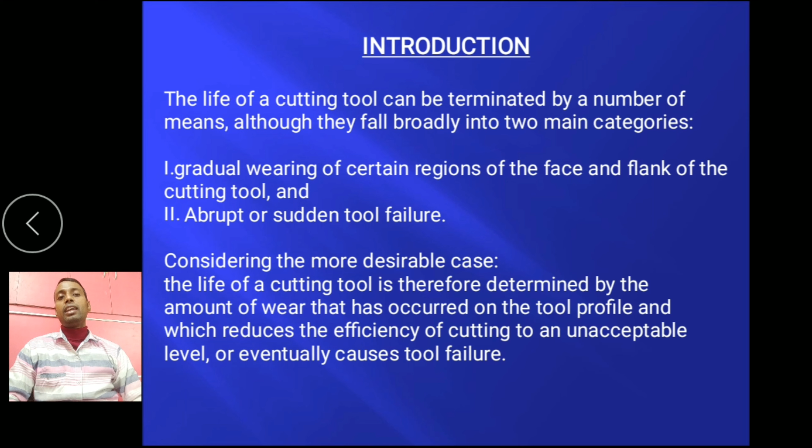Considering the more desirable case, the life of a cutting tool is determined by the amount of wear that has occurred on the tool profile, which reduces the efficiency of cutting to an unacceptable level and eventually causes tool failure. When the tool wear reaches an initially accepted amount, there are two options: to resharpen the tool on a tool grinder, or number two, to replace the tool with a new one.

This second possibility applies in two cases: when the resource for tool resharpening is exhausted, and number two, the tool does not allow for resharpening, as in the case of the indexable carbide insert.

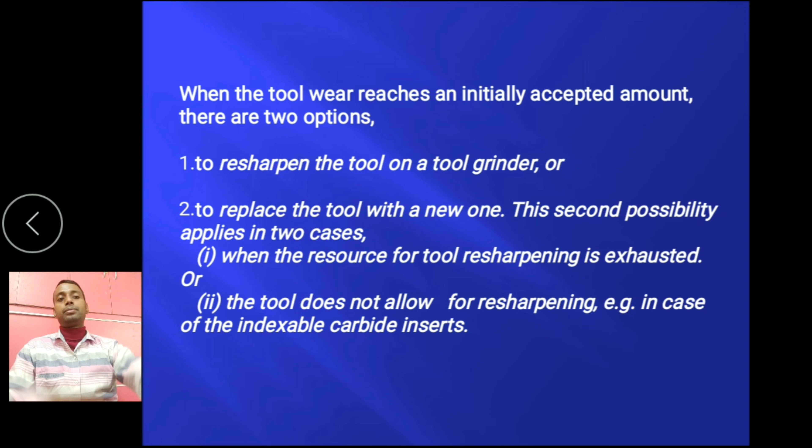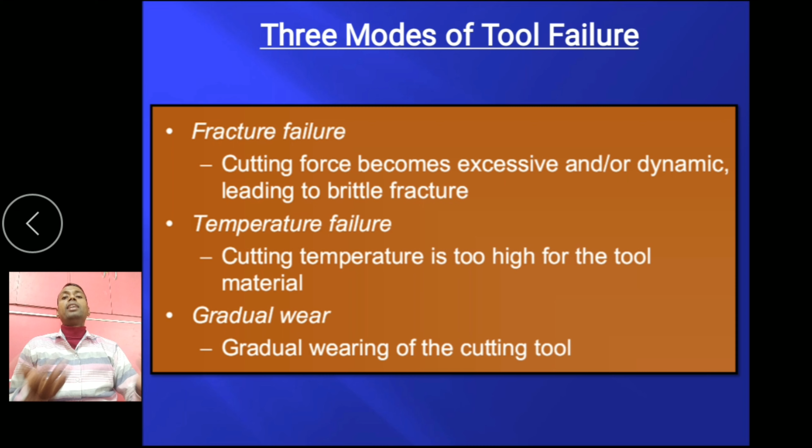There are three modes of tool failure: fracture failure, temperature failure, and gradual wear. Fracture failure means cutting force becomes excessive and dynamic loading leads to brittle fractures. Temperature failure means the cutting temperature is too high for the tool material. Gradual wear means the cutting tool wears gradually as so many machining operations take place, and the tool fails after a certain time.

The preferred mode of tool failure is gradual wear. Fracture and temperature failure are premature failures. Gradual wear is preferred because it leads to the longest possible use of the tool.

Gradual wear occurs at two locations on the tool: one is crater wear and another is flank wear. Crater wear is generally found on the rake surface, at the top of the rake surface, and flank wear is generally found on the clearance surface. This is the diagram.

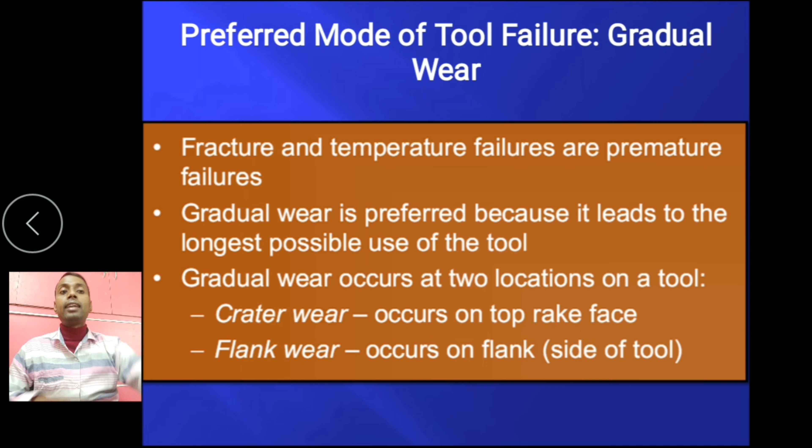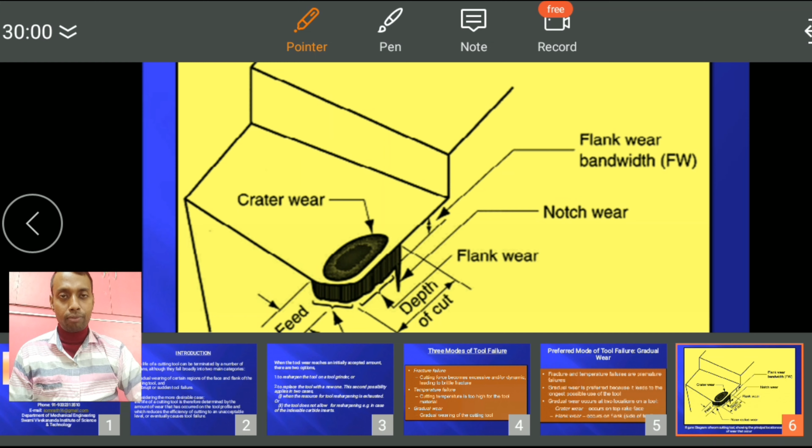Crater wear is found here, basically on the rake surface. Let's see the proper diagram. Crater wear is found here, and flank wear is found in the clearance. This is the original view of crater wear and flank wear.

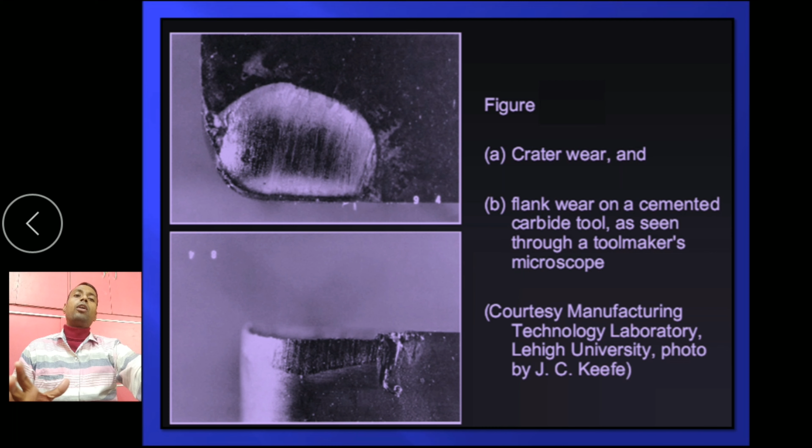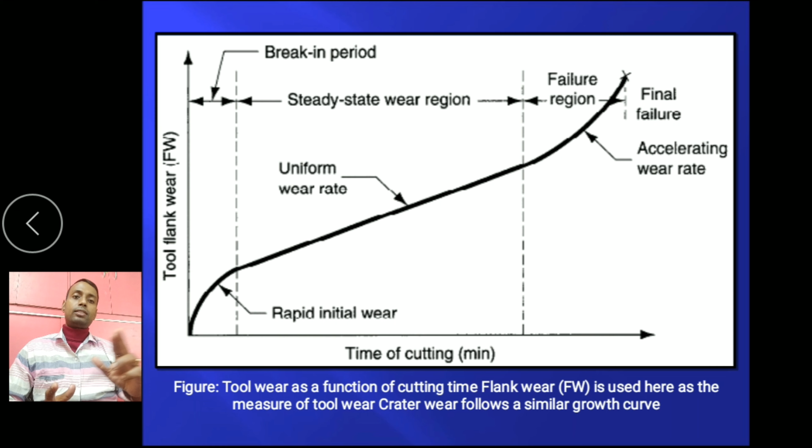Tool wear as a function of cutting time, flank wear: this is the rapid initial wearing. After that, for a certain time, this continues going on. This is the uniform wear rate region. After that, failure occurs. This is the failure region.

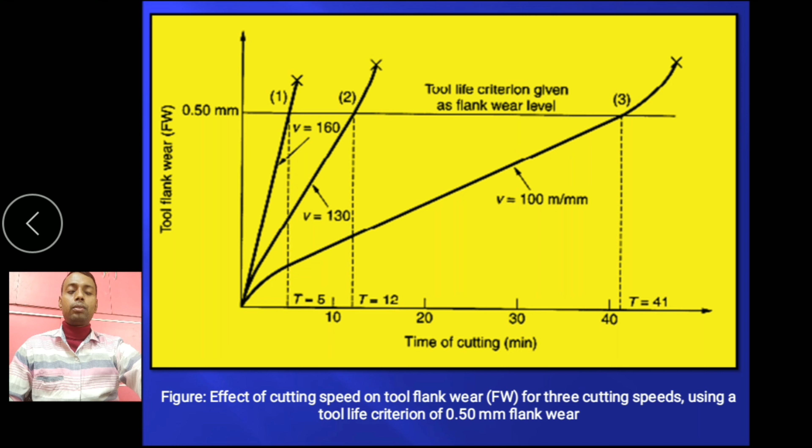Now, scientist Taylor expressed some equation for tool life: V times t to the power n equals constant. A very simple equation: cutting velocity and tool life give a constant. If V is increasing, T will go down. If T is increased, that means V is obviously low.

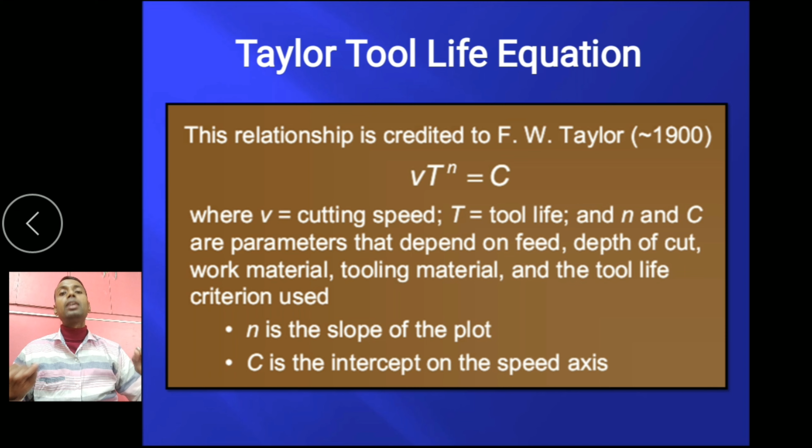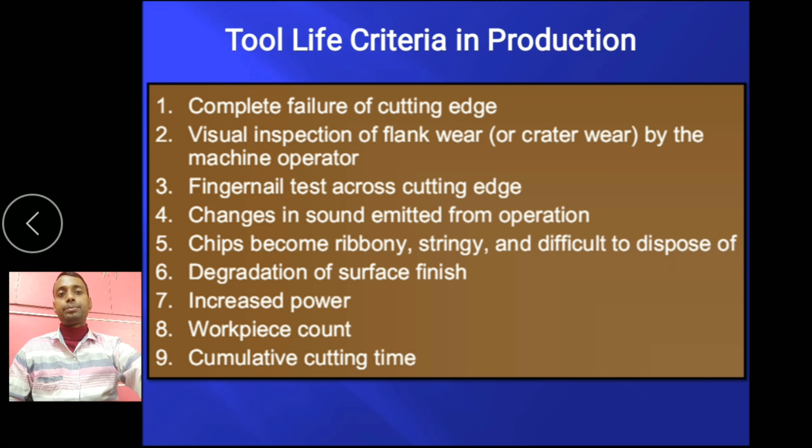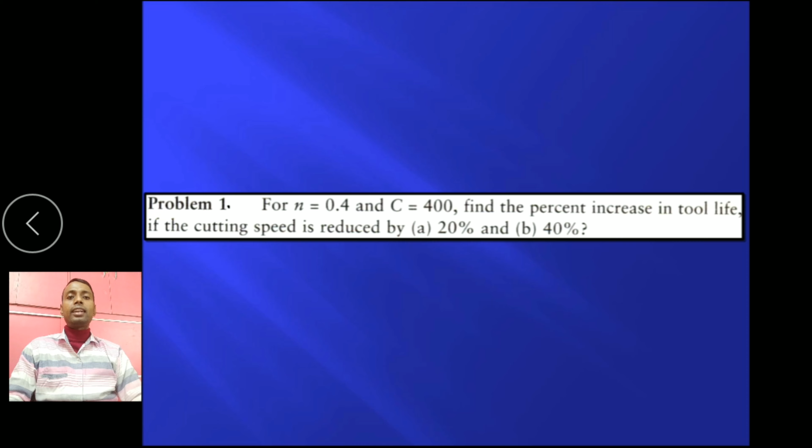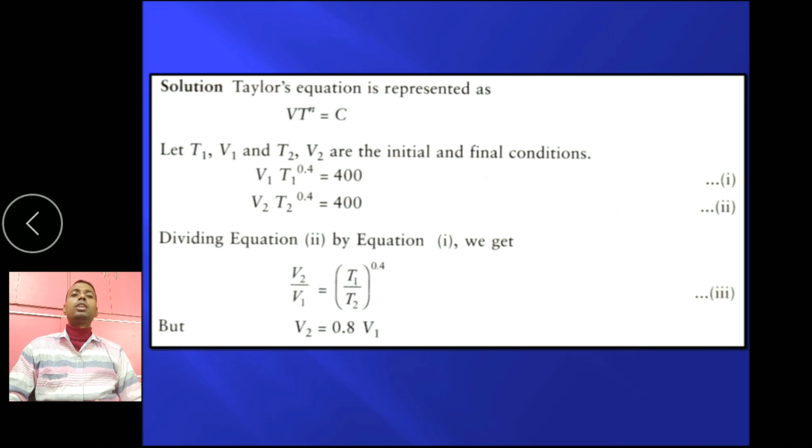Now, if I solve one problem, it will be better understood with this equation V t to the power n equals constant. For n equal to 0.4 and c equal to 400, find the percent increase in tool life if the cutting speed is reduced by 20% and 40%. So the formula is V t^n equal to constant: V1 T1^0.4 equal to 400, V2 T2^0.4 equal to 400. Dividing this, V2 equals 0.8 V1.

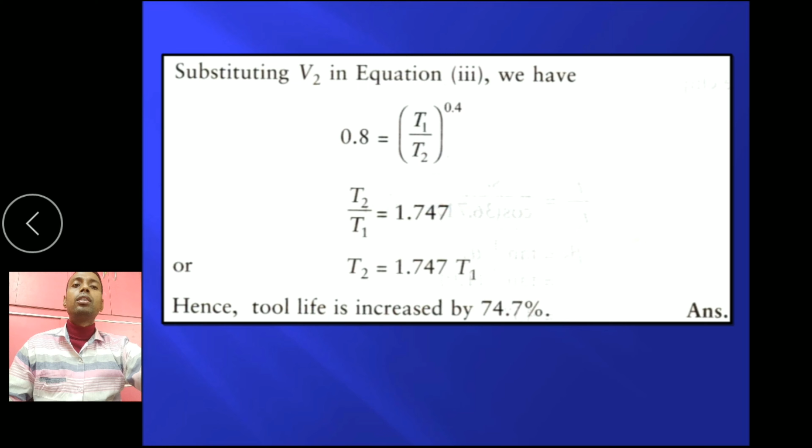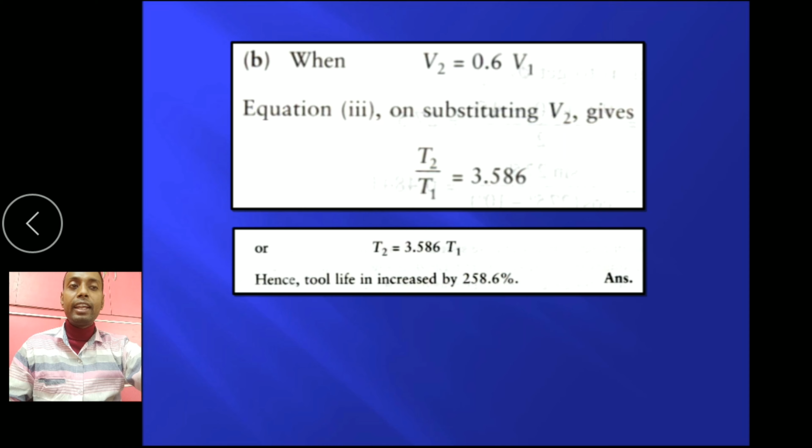So replacing this, what is T2? Hence tool life is increased by 74.7%. And for part B, when V2 equal to 0.6 V1, T1 equals this, T2 equals this, so tool life is increased by 258.6%. So, thank you everybody.